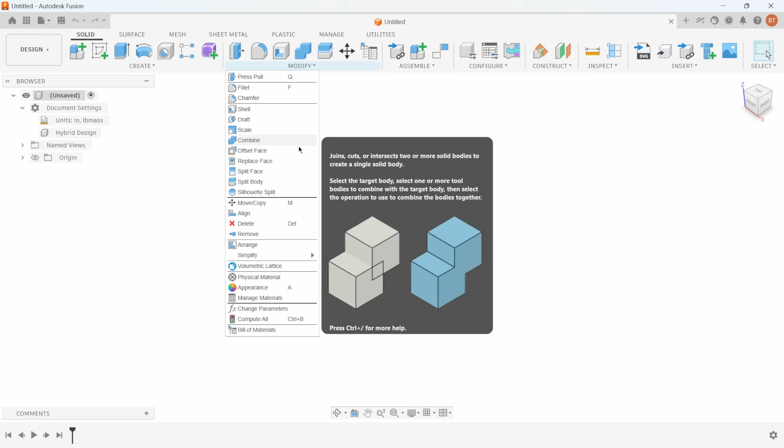In this video, I'm going to be talking about the Replace Face functionality under the Modify menu. The first thing I'm going to do is create a new component. I just updated to the latest release of Fusion and noticed something a little bit different that I wanted to point out. I clicked on New Component, and you'll notice I'm in a hybrid design. When I click on New Component, it says Type as Hybrid, and I see this design name External, and it's wanting to save into this particular location.

If I were to hit OK, it puts me into this Edit in Place environment, and this is going to save an external component. You can see that link right there. This is a little bit different than how Fusion has worked previously. Let me show you the process for this.

I just undid everything. I'm still in my hybrid design. I'm going to say New Component, and for the type, I'm going to say I want to create a part. Now you'll notice I'm doing a standard part design, or I could pick sheet metal, but in this case I obviously want standard. I have the option to say it's an external part, but I don't want it to be. I can give it a name, so I'm just going to call this Handle and say OK. Now I have my Handle component that's not externally linked.

Now, I can kind of see why they did this. It is a good idea to have externally linked components if you're working with assemblies. But in this example, I'm just doing a single part, so I don't really need that functionality. So that's how you can work around that.

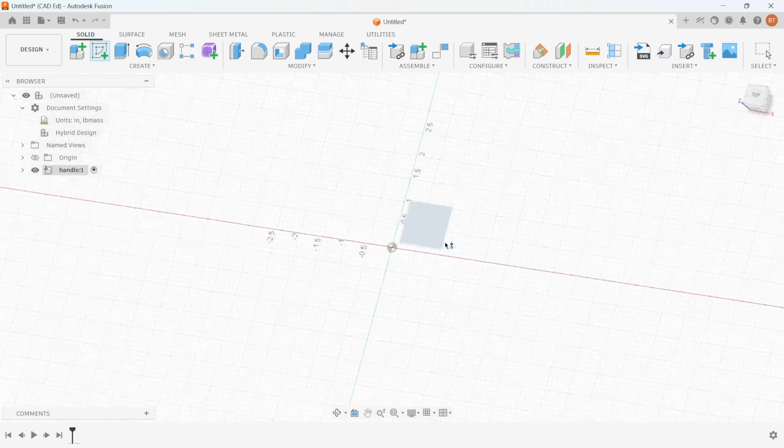Okay, so what I'm going to do is just create a quick shape here. I'm going to use the spline command, and I'm just going to draw something that looks like a handle of some component, just some kind of a weird shape. Maybe I'll move some of these points around just a little bit to give it some character, something like that.

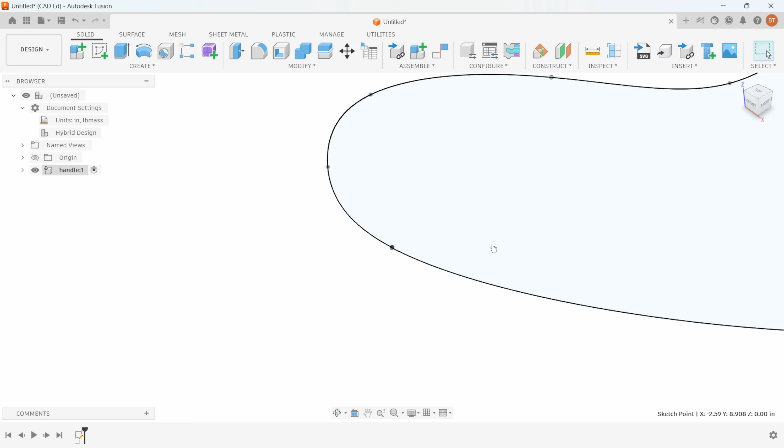Then I'm going to extrude this, give it some thickness, let's just say -2 in this case, and say OK. Now I want to give this top surface some curvature.

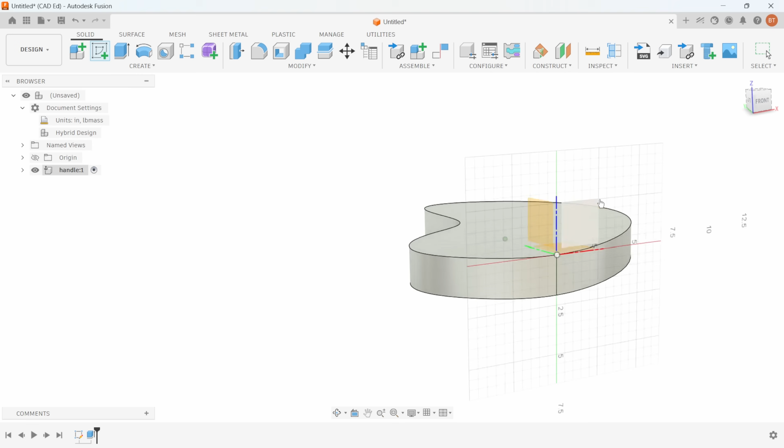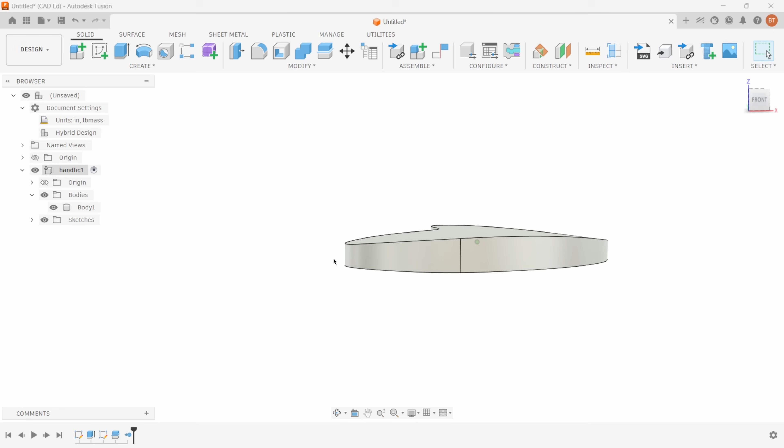There's a couple different ways you could do this. A lot of times people would create a sketch like so, and then maybe just use the arc command and do a 3-point arc like so, and then split the body using this as the splitting tool. That basically splits it into two separate bodies, and I would just remove that top body. It gave it some curvature, but only in one direction, only in the direction of that sketch, of that curve. It didn't add any in this direction.

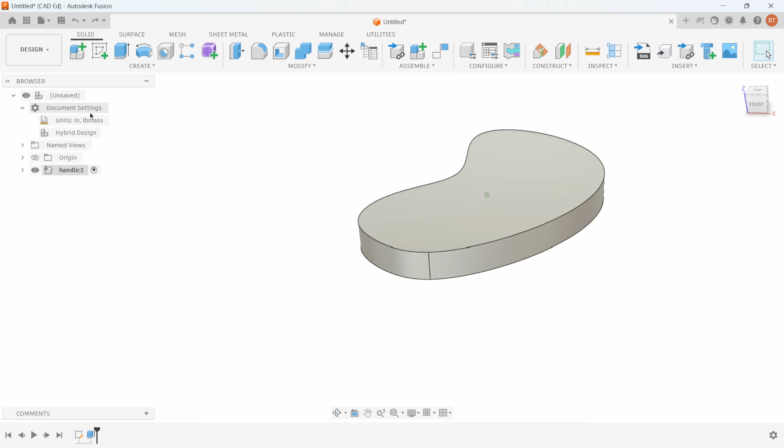So that's not always the best solution. It only basically split it in that direction. So the other way is to do a direct edit. But to do that, you have to change into direct modeling, and you would lose all of your history tree or your timeline. If I say change to direct modeling, the timeline, all your features, all your parametric history will be deleted and cannot be restored. So I'm going to say delete.

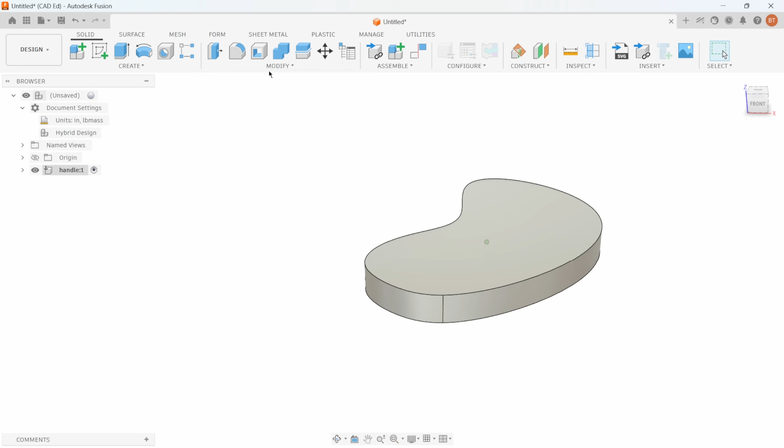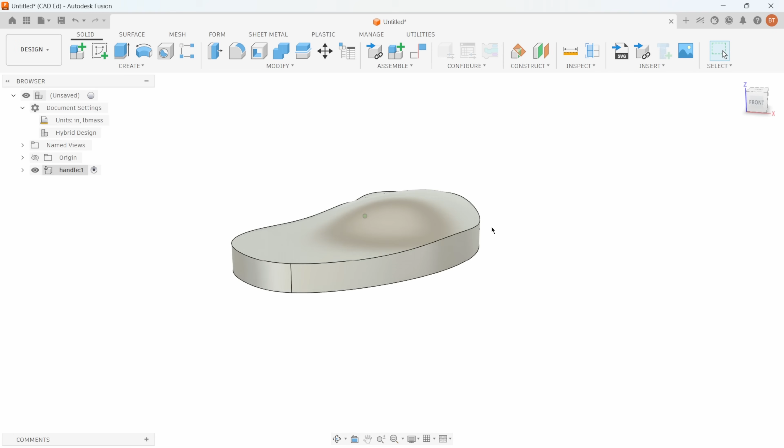You'll notice my timeline goes away, but now I can do this Edit Face. That allows me to pick on this face. I can add some extra features in there, and then I can pick on points or edges or something like that to edit this particular face. So I'm just going to go ahead and say OK. Now you can see I've added that bump to that face.

But again, you have to destroy your timeline to do that, so I don't always like that option either. I think the best option is to use this Replace Face.

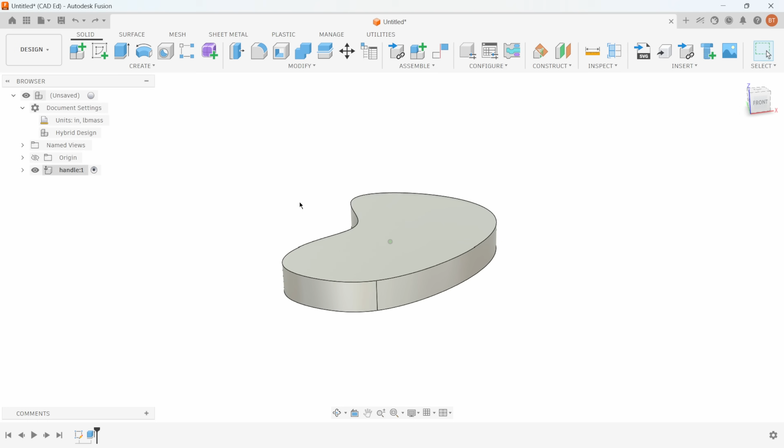So to do that, you need to have your standard shape, and then you have to have another shape that you're going to use as a reference. I like to use the form tool to create that shape. So I'm going to say Create Form, and I'll just use a plane in this example.

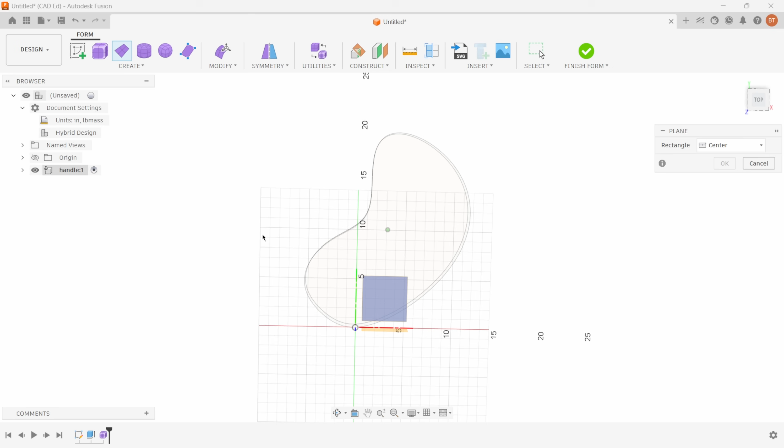Now, the key here is your shape has to be bigger than your object. So I'm going to say 2 point. I'll pick on maybe this top face here and draw a rectangle that's larger than my original shape. It can't be smaller like so. So I'm going to do something like this.

Once again, I have the ability to control how many length or width faces I want. In this case, it's doing 3 across and 3 up. I could do symmetry if I want symmetry. I don't in this example, so I'll just say OK.

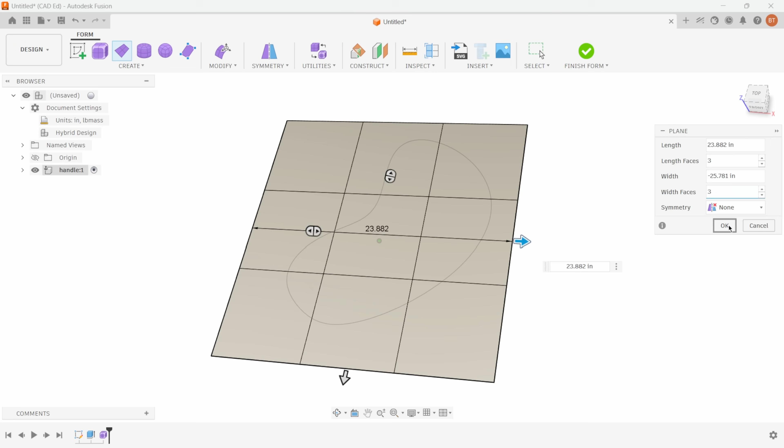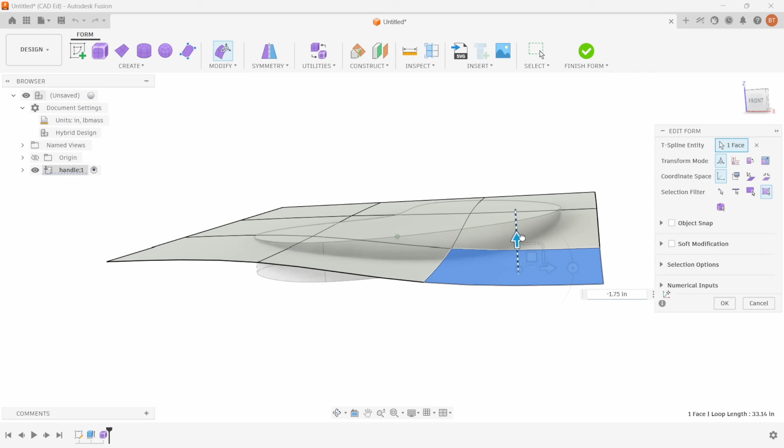And I now have basically created a form face that I can now edit. So for example, I might want to pull this face down. I'm going to right click on it and say edit form, and then I can just grab this arrow and drag that face down.

You can see how it's modifying just the plane, and how I pulled that face down. I might want to grab maybe this point here, lift that up a little bit, and I'll say okay. Now I have this shape here that's kind of bent in multiple directions.

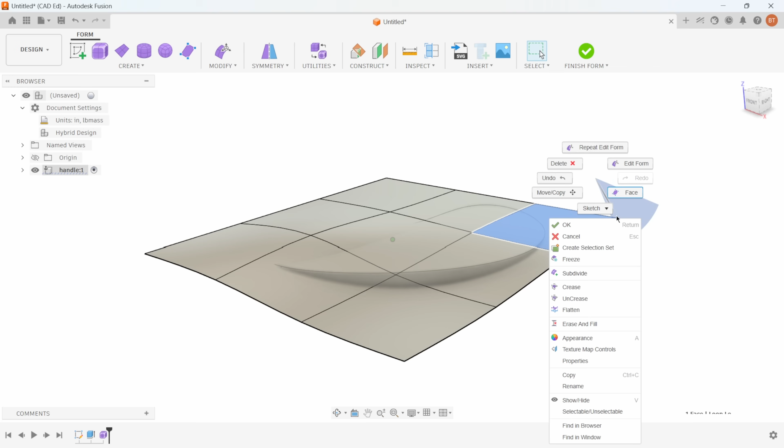In fact, let's grab this face, edit form, and lift that up like so. I'll say finish form, and now if I expand open my bodies, I have my original shape, and then I have this form surface.

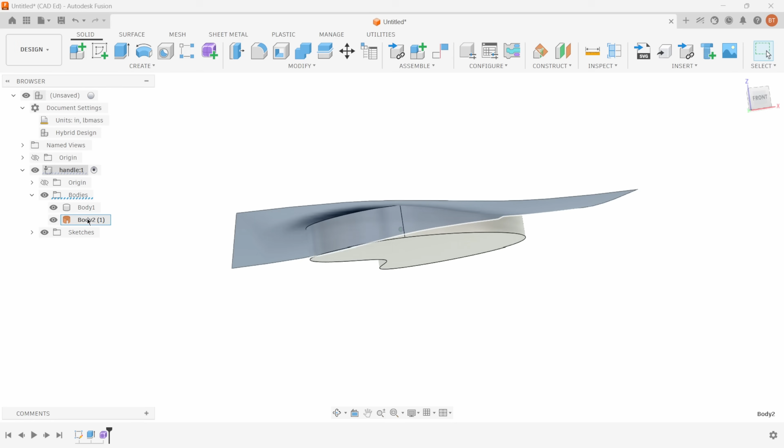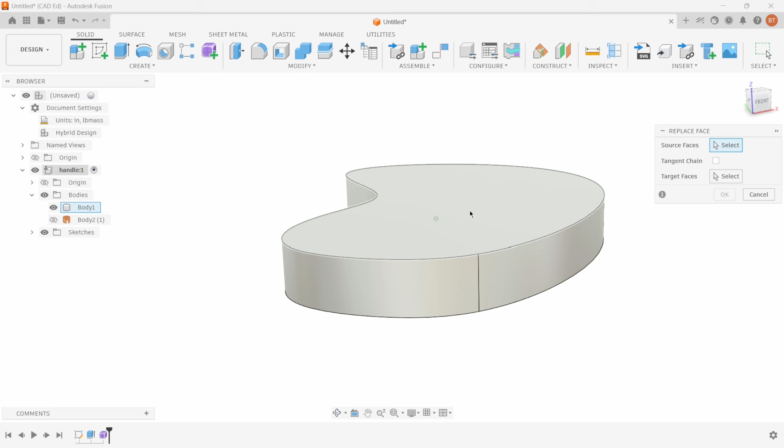If I go under modify, replace face, it's asking what is the source face and what is the target face. The source face is kind of buried underneath, but I can see some of it up here - it's the top of the original body. I'll turn this guy off, so this is my source face. I'm going to click that. And then what is my target face?

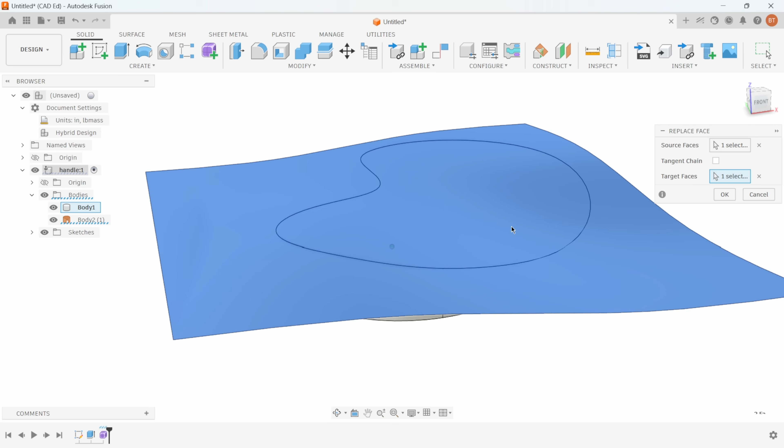My target face, I usually pick the bottom side of this surface, and watch what happens right here when I click the surface. You'll see how that body grew and extended up to that surface, and it basically removed the section that was extended up above.

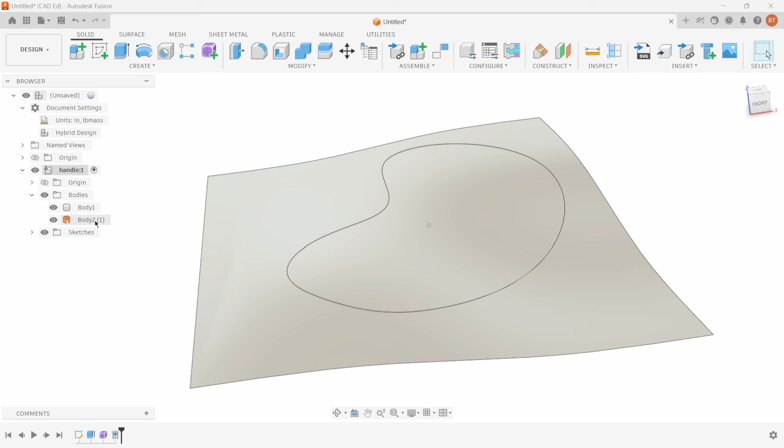I'm going to hit OK, and let's turn off this surface, and we can now see that what used to be a very flat surface now has curvature in multiple different directions, driven by this form surface. We replaced the flat surface with this formed surface, which I can then just turn off. What's nice about this is we can make changes to this form surface.

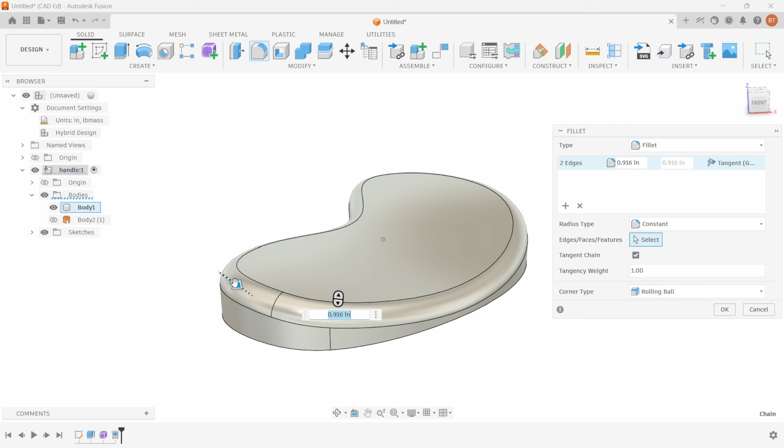In fact, check this out - I'm going to go ahead and add a fillet to the edge of our model. So I'll just come in here and let's make a 1-inch fillet. I'll say okay, and there's our shape.

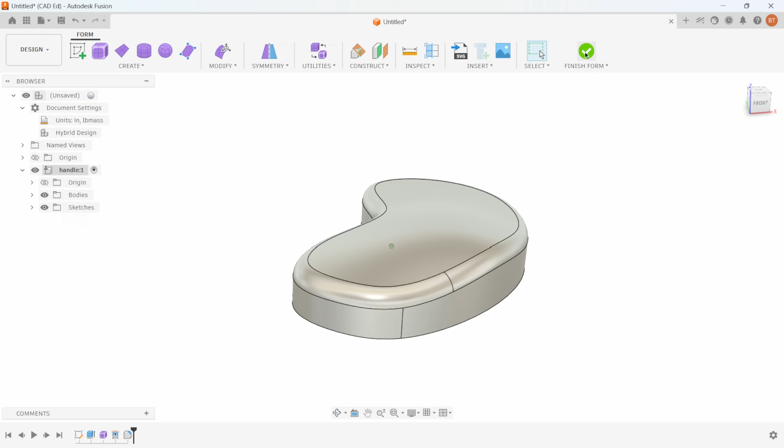I'll come back to the form. Let's go ahead and edit the form. Maybe we'll bring this point up higher like so. Say okay, finish the form, and it updated our model. So where this used to be much lower, it's now lifted it up, and our downstream processes, the fillet, updated also.

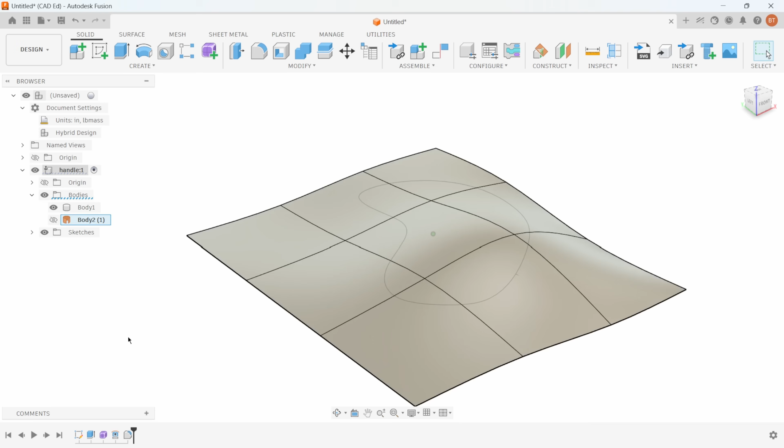So you can come back and make as much changes as you want to this form right here. I could come in and, for example, subdivide and add more detail into a particular section. So let me just add something like this in here, say okay.

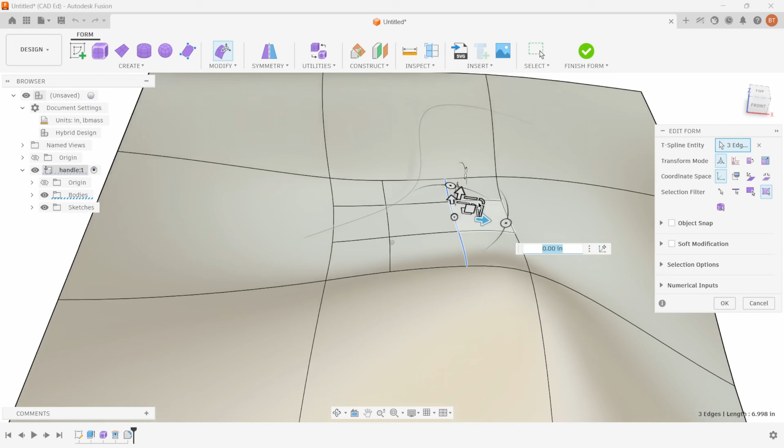Maybe we grab these 3 lines here, edit the form, and push that region down just a little bit. Say okay, finish the form. And you can see how we've added that dent into our model.

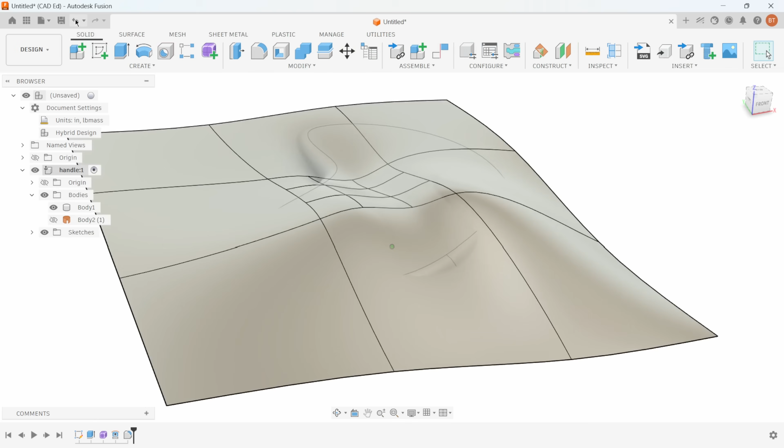Or we can even take it a step further, where I'll undo that and maybe even subdivide this even further. So I'll go ahead and select all these faces, subdivide those like so.

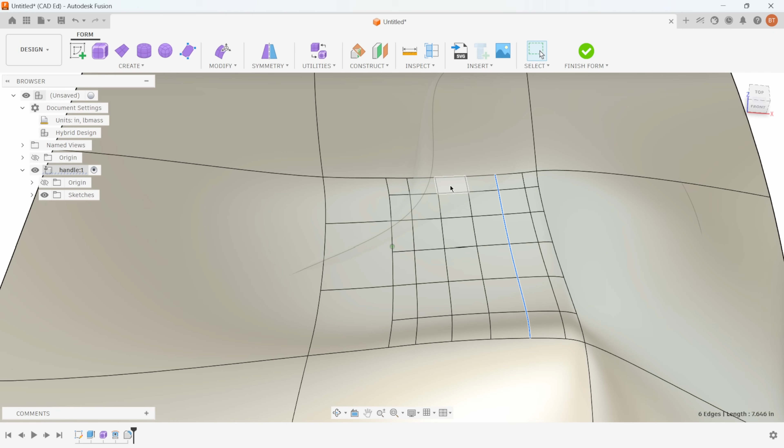And now I can control - like I want to add some ridges, so I'll just click this edge here and maybe this edge here. Lift those up, and you can kind of see how it's creating those ridges right there. Say okay, finish the form.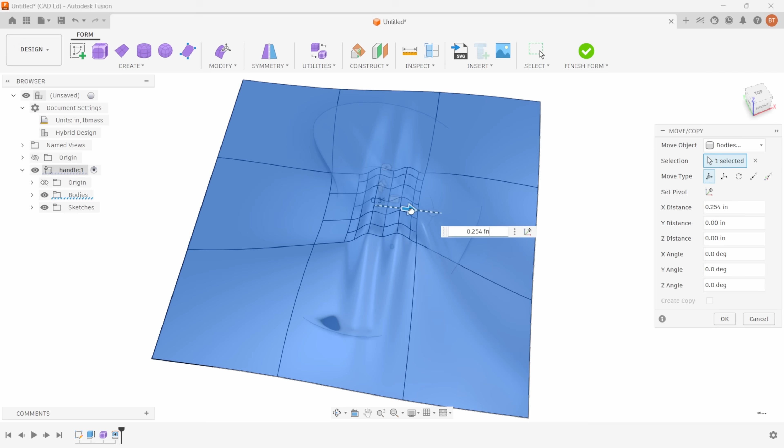I can also do things such as moving this whole form. I'll just come in here and say move, and let's rotate that form so it's more like in line with this. Maybe we'll move that over a little bit, say okay, finish the form, and you can see how we've now made the ridges kind of run along in that direction.

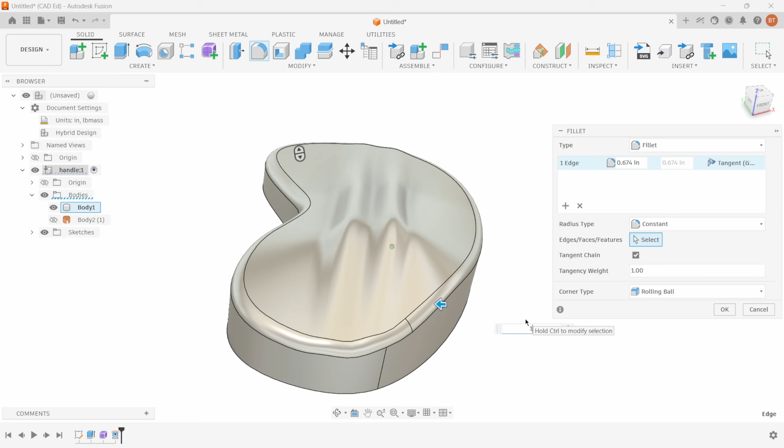So you have a lot of control over how this works. Now I want to go ahead and try adding that fillet back in here. So I'll say fillet, drag this, let's try the 1 inch again. And sure enough, that allows me to add that fillet back in there.

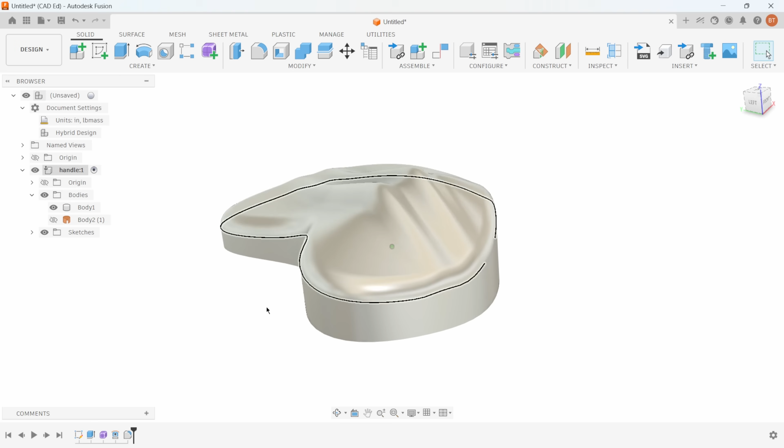I'll turn off my edges so we can kind of just see what it would look like. And you can see how powerful - you have the ability to create a complex shape like this. I know it's kind of a weird shape, using just replace face, starting with a basic shape with something like this. I didn't lose my timeline or my history, and I'm able to make changes to the underlying model very quickly and very easily using the form tool. So give that a try and see what you think.